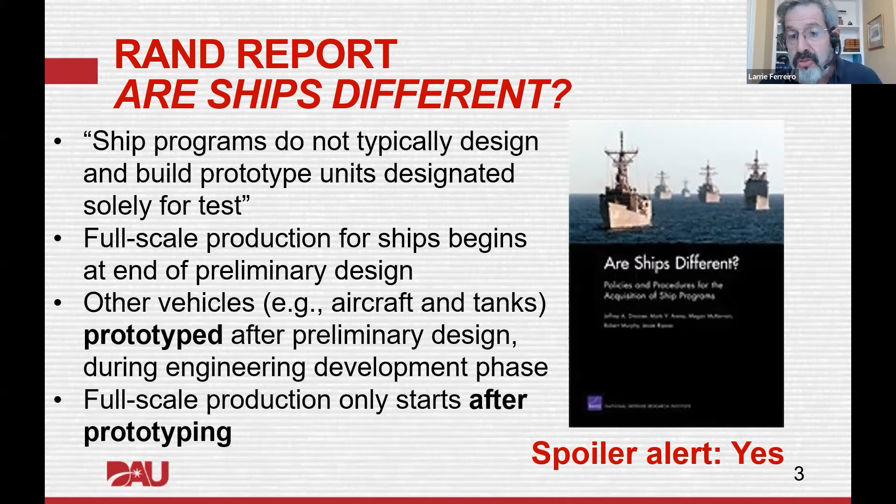Next slide, please. So the first thing I did was take a top line view using publicly available information on ship and aircraft programs. I chose ships and aircraft specifically because they represent, in many cases, equivalent amounts in terms of unit cost. So a top line ship might have a comparable unit cost to a top line aircraft.

And even though the production numbers can often be quite different, in theory, once you've done your R&D, you should be able to produce 5 or 10 or 100 models of the same platform, no matter what it is, because you've done the research and development leading to production. So I am specifically here comparing not production costs, but the cost to develop and get ready for production these kinds of platforms.

I've looked at 4 comparisons. The first is from the UK, two programs that were approximately contemporary, 1980s: the Type 23 frigate and the Typhoon fighter. The development cost for the Type 23 frigate was less than $1 billion, while for the Typhoon fighter it was $24 billion. That's a 34 times difference in development cost, before the ship or aircraft even began production. I'm not talking about total cost, just the cost to get the thing ready to be built. So that 34 times is not 34%, it's 3400%.

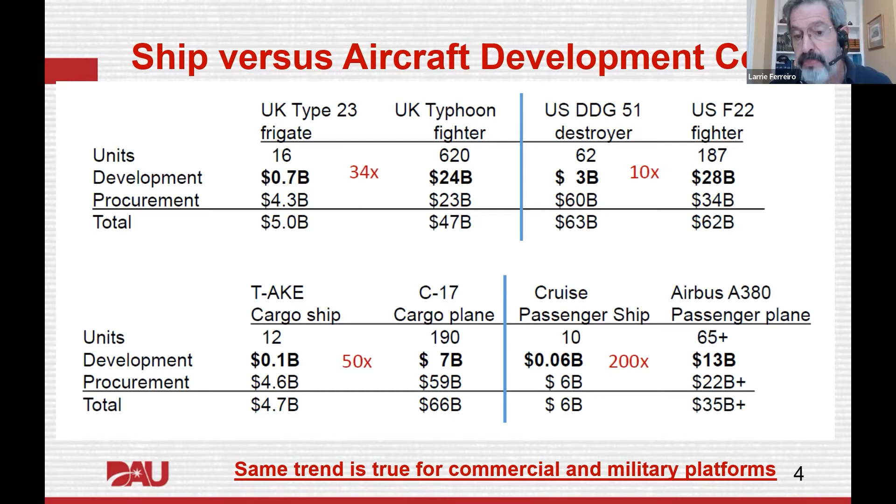This is a 200 times difference in development cost: a passenger plane at $13 billion, versus about $60 million with an M to develop a cruise ship. That's 2 orders of magnitude, 20000%, whatever form you want to call it. It's enormous, and any minor variations in some of these costs would have almost no effect on the overall bottom line. It is far, far, far more expensive to develop an aircraft - by 1 to 2 orders of magnitude - than it is to develop a ship, whether military or commercial. So that's the first bottom line.

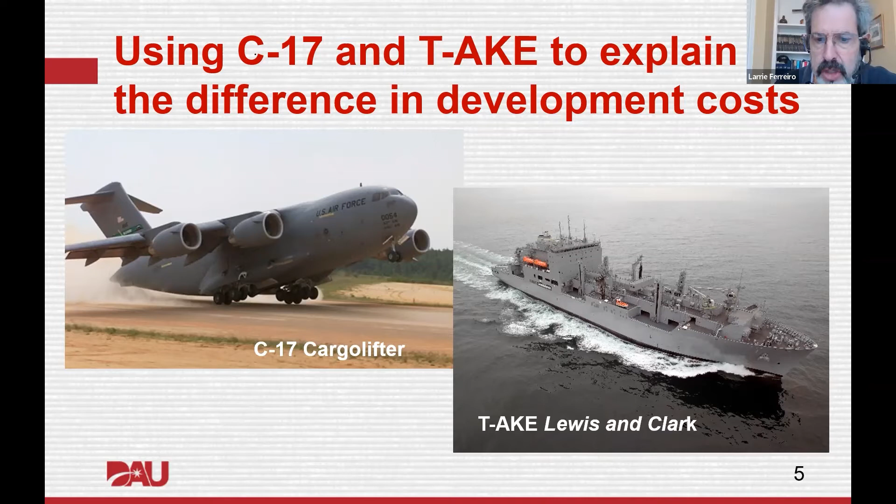Next slide. I wanted to find out why that was the case, and to do so I took a deep dive into two platforms, again somewhat contemporary - 1980s, 1990s - the C-17 cargo lifter aircraft and the T-AKE Lewis and Clark ammunition ship.

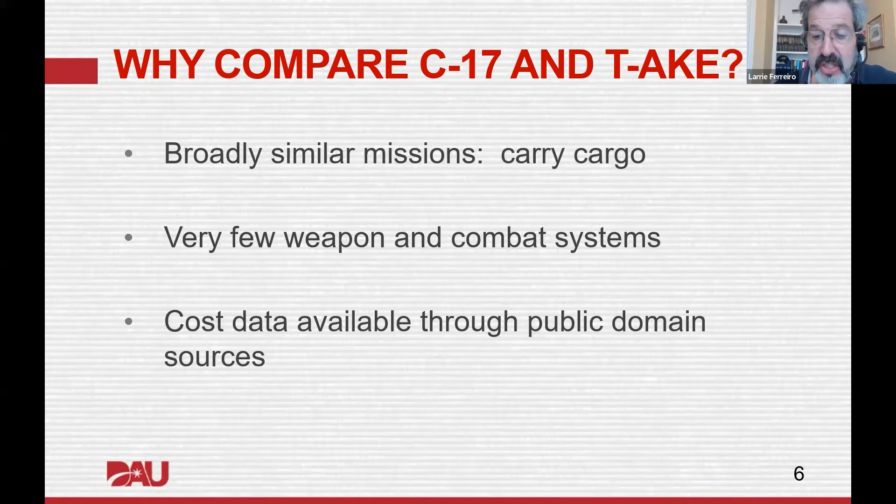The mission of the ship was to carry cargo, so these are not ships designed to normally accomplish frontline combat duties - they don't have weapon systems and combat systems, which tend to skew the numbers. They were, for all intents and purposes, as basic an airframe and as basic a ship as I could find, and most importantly, I could find cost numbers through public domain sources. You can imagine getting cost numbers from Boeing or from Carnival published is probably a bridge too far. So these were all publicly available numbers in enough detail that I could make a side-by-side comparison, which I did.

This is the second bottom line: when looking at development cost - and this is only development cost, not production cost - each of these platforms, when fully developed and in production, cost between 150 and 250 million dollars each. So the unit production cost of the ship and the airplane was not terribly different. I want to be very clear about what I'm saying and the basis for it, because frankly these numbers are surprising.

The predicted 1991 research, development, test and evaluation cost for the C-17 was estimated to be $4 billion. The actual cost from later data took it up to 6.6 billion. By contrast, the R&D cost for the T-AKE, most of which was in detailed design, was only 150 million. So on the left side, 6.6 billion with a B; right side, 150 million with an M.

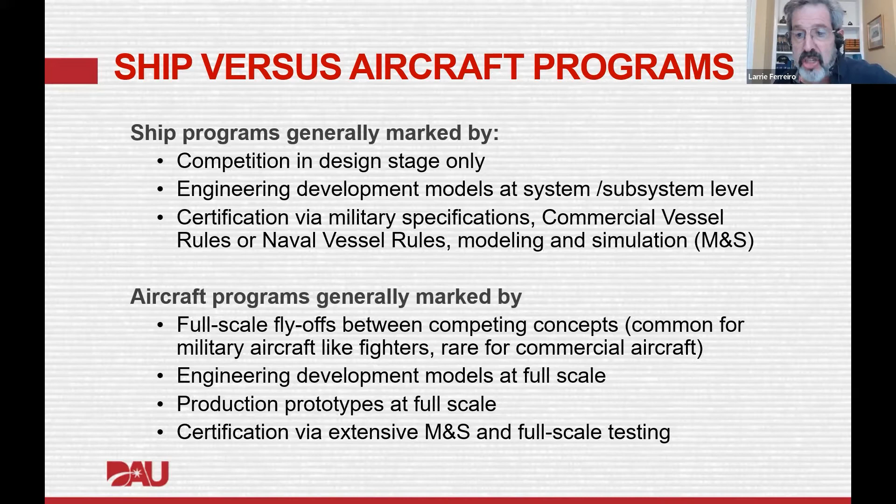Next slide, please. So I'll walk you through what it looks like at each stage so you can get a better idea of how this change flows through the design and development phase. And this is taken from a typical large engineering program. Military programs follow these steps.

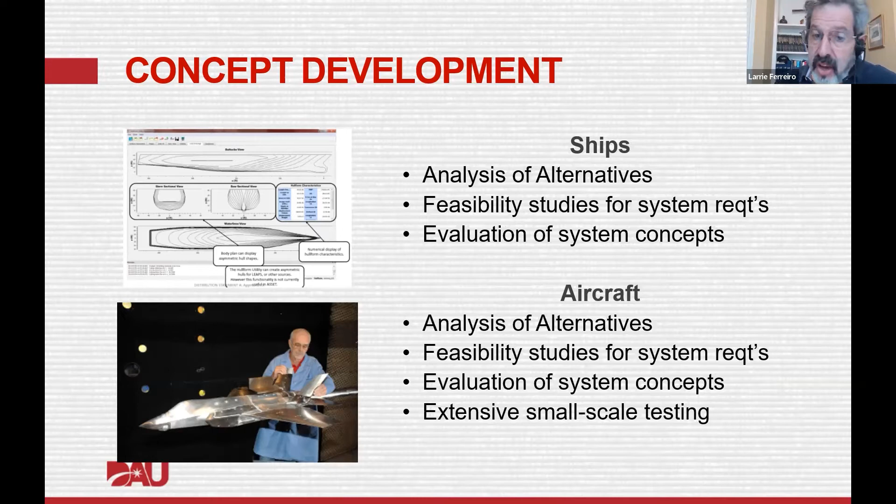Broadly speaking, the first one, I'm not going to use milestone A, B, and C. Concept development, that's the earliest stages where you're just trying to figure out what you want to build. For ships, they're paper studies, they're computer studies. For aircraft, you do both, plus you do a lot of small scale testing, usually in wind tunnels and other types of testing facilities. So already you're seeing a difference at the concept development stage. Ships are never physically modeled, and if they are, that's a really rare occurrence. Next slide, please.

I'm sorry, I'm going to have to pause here, okay?

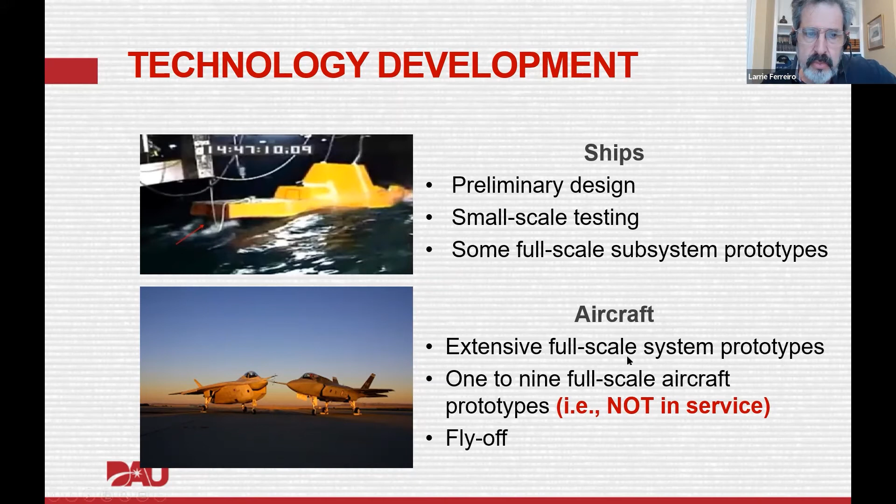Finally, when ships or aircraft are put into service or ready to be, the way they're accepted is also different. As I've already mentioned, the detailed design and construction for ships is certified through plans and then inspection. American Bureau of Shipping, Lloyd's Register, Germanischer Lloyd do this using essentially visual inspections and other inspections, but they're not tested at full scale compared with aircraft.

For those who haven't seen the bottom left frame, that's an example of what's called a wing breaking test, a certification by full scale testing. What's going on there is this aircraft, I believe a 787 with composite wings, is being bent until it ruptures, and that is full scale. The rupture test is intended first to verify it will meet load standards, and second to help improve the modeling and calculations. So this is a full-scale destructive test, and we never get to do that with ships.

Most of us would have to go back about 100 years to examples of where we took an actual ship and broke it in half. This is another example of how ships and aircraft are different. Next slide.

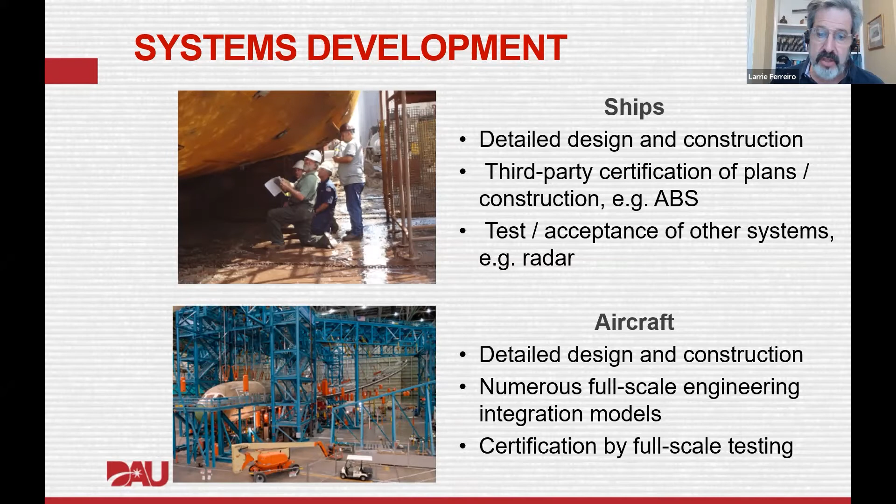So I am saying the same thing: the primary driver is full-scale testing and prototyping for aircraft versus the rules and standards for ships. This led me to the next question: why is this the case? Next slide.

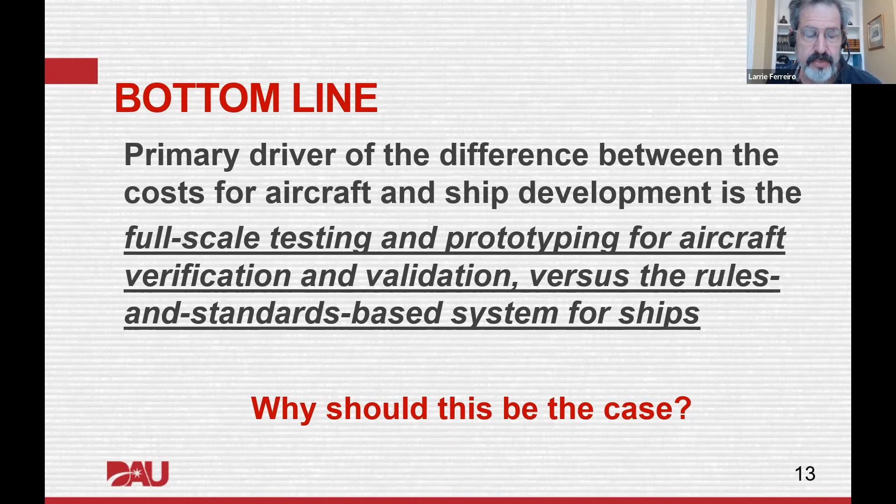The first thing I want to do is bust some myths, because in my discussions with many engineers from both sides of the aisle, the aircraft aisle and the ship aisle, I received many comparable explanations, none of which held water, so to speak. The first one is that when things go wrong in the air, you don't have time to bail out, whereas when things go wrong at sea, you have time. Well, that ain't the case.

First of all, most of us in the commercial world know about the Estonia, which lost 800 people in 1994. Compare that with TWA 800. And by the way, fighter aircraft have ejection seats. More recently, we have the cargo ship El Faro, lost with 30 or 40 crew aboard. So the idea that aircraft are more safety critical goes out the window.

Ships have lower production numbers, but again, the numbers are not so different that they would account for the enormous disparity in R&D costs. The DDG 51, by the time it's done, might actually have 100 units. That's in the ballpark of F-22s, and the B-2 bomber only has 20.

Finally, the idea that aircraft are more complex than ships also falls by the wayside. There's no widely accepted metric for complexity. Let me be very clear: the metric I am using was from RAND, which is a very simplistic and not particularly satisfying 'how many piece parts does it have' metric. Using just that, an Ohio class ballistic missile submarine has twice as many piece parts as an F-16 fighter. So again, the potential engineering reasons for why it should be so much more expensive to develop aircraft fall by the wayside.

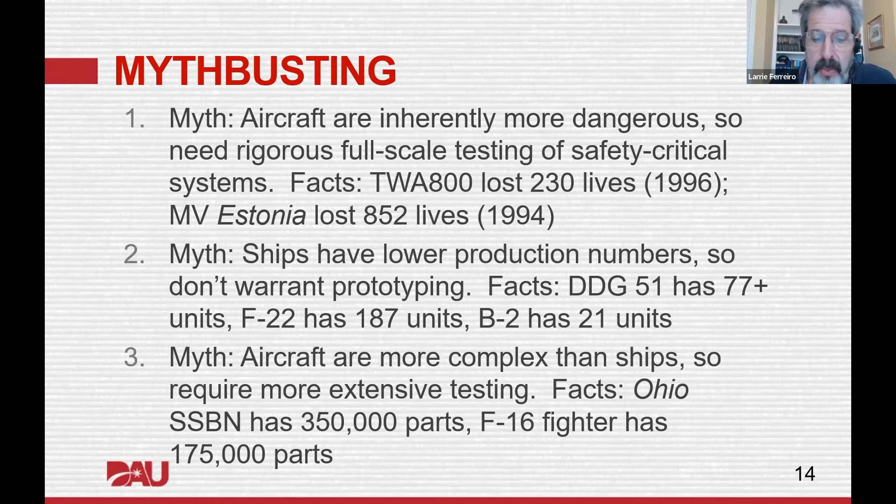Let's go to the next slide.

My conclusion, number one, is there aren't any valid reasons. Well, I'm going to start from the bottom. There are reasons why shipbuilding programs could and should have full-scale prototyping, because many of the dangers we face in the maritime world are sufficient to require some kind of verification and validation at full scale.

There aren't any real reasons why aircraft could not use the kind of rules and standards method that ships have. And in fact, that did happen, and I'll get to that in a few slides. So the two types of vehicles really could have comparable verification, validation, and prototyping programs, but they don't.

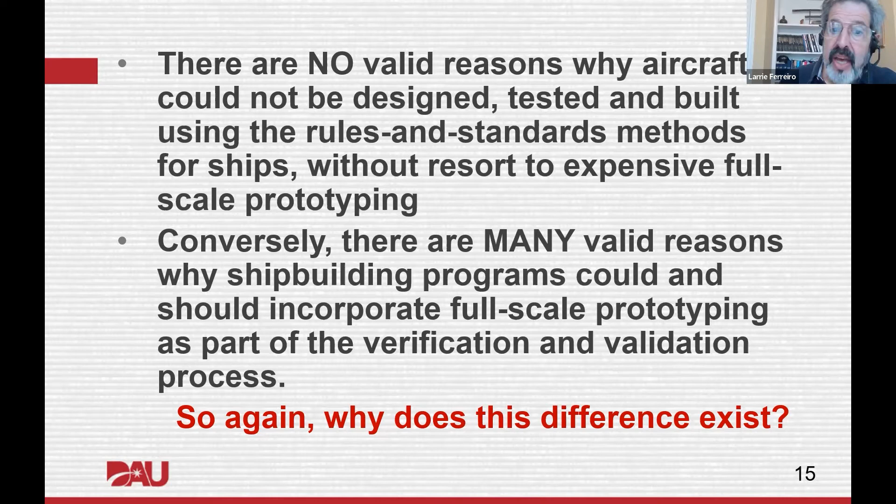So I keep coming back to the same question, why? And as a historian, I will tell you why. Next slide.

Ships came from the civil engineering world. The modern methods of designing and building ships were developed at the same time as the modern methods for designing and building civil structures like bridges, skyscrapers, roads, and railroads. And if they look similar, it's because the same people did both.

In Britain, Isambard Kingdom Brunel famously built bridges, and he built the Great Britain and the Great Eastern. His contemporary, the structural engineer William Fairbairn, did very much the same. And through history, you saw this parallel development of civil engineering and naval architecture, which never really fully diverged.

This is an example that I love to give. I went to look at web frames and plating analysis in the ABS steel vessel rules on the right, and the New York City structural code for bridges on the left. The basic idea that you're using formulas based on things like length and depth and a few other items is remarkably similar.

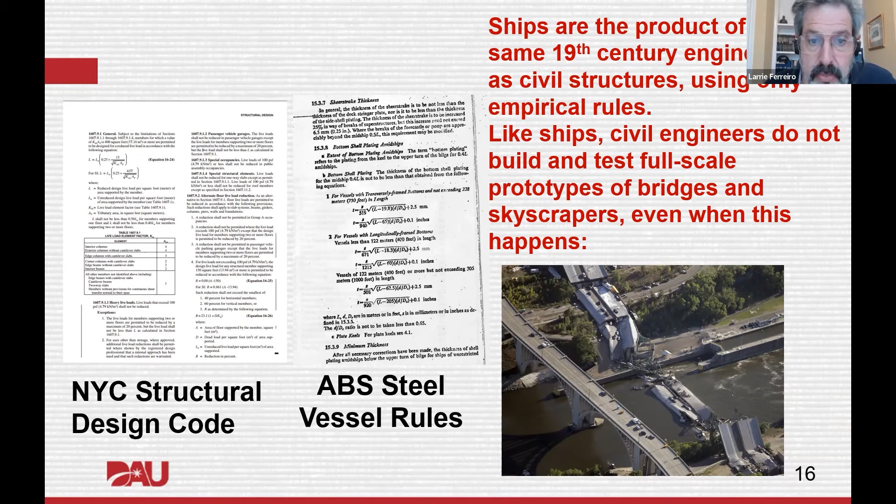Aircraft grew up in the 20th century world of physics. The people most noted for development of aircraft engineering, Prandtl and von Karman, were engineers, but they had the same education as Einstein. It was grounded right from the beginning in first principles physics, and the money followed.

As early as the 1920s, we saw this difference. In the United States, there were two ship model basins, one in Washington, the other in Michigan. The experimental model basin under David Taylor had, in then-year dollars, $100,000, and NACA, the National Advisory Committee for Aeronautics, which was the predecessor to NASA, already in 1920 had 10 times the funding for R&D.

The X programs are another example. In the 1960s in the United States, you had something called the second offset strategy. This was a way of countering the Soviet numbers of troops and guns and tanks, not by trying to defeat them tank for tank and troop for troop, but by outthinking them and pouring huge amounts of money into the technologies.

I know in one of the previous discussions I was in with all of you, there was a question about when computer-aided modeling and computational fluid dynamics was developed. That was always developed by the aerospace industry because that's what money was being thrown into.

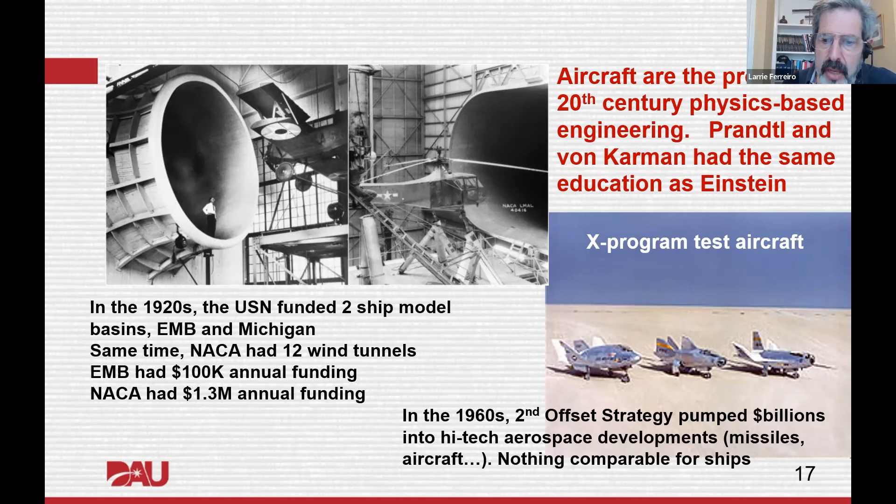And even today, if you look at the US budget, aircraft account for three times the amount spent across the DoD compared to ships, in design, construction, maintenance, and operations. So the money has always followed aircraft, and the R&D and testing and prototyping and validating follow the same pattern. Next slide.

Now, as I said, I just want to be certain you understand that there isn't a valid reason why we could not do what ships do. In the 1930s, ABS, Lloyd's Register, and Bureau Veritas all set up aircraft divisions to do the same kind of class system that was used on ships. And it was successful for a while, until governments took over airworthiness, and then that stopped. They went back to this very physics-based process. Next slide.

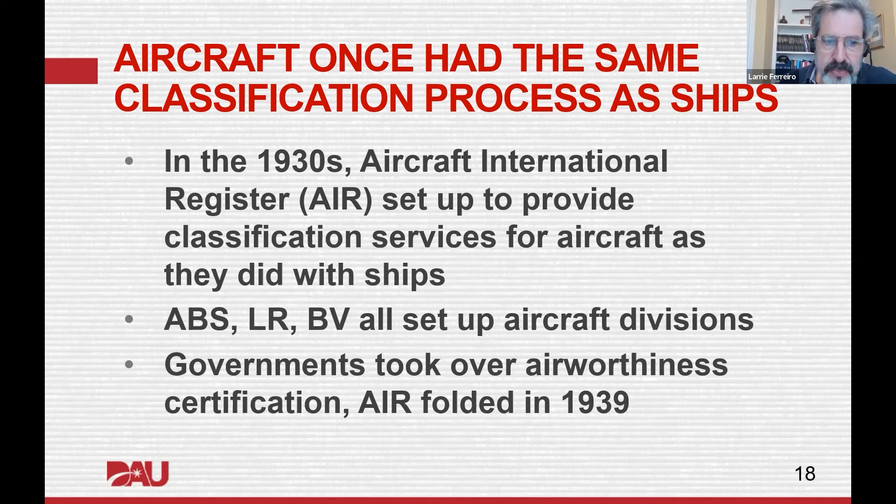So my conclusions. Number one, repeating, it is much more expensive to develop an aircraft. And the rationale is not because the platform is different, but because aircraft are the product of 20th century first principles physics-based engineering, and ships are the product of 19th century rules of thumb engineering.

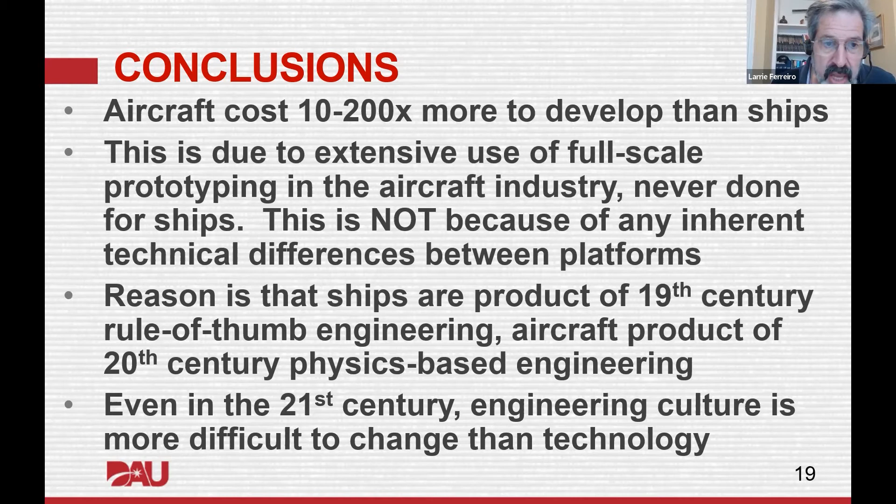And it hasn't changed even here in the 21st century. So my next conclusion is that we should not accept this fact lying down. As I've said, there are many reasons why ships should and could look more towards systems engineering and full-scale prototyping as a way of improving the product.

To give one example, the Estonia, which had an accident where the bow visor was found to be faulty. Even after that, there was no systematic effort to define the wave loading of why the bow visor failed. There was no effort to make full-scale tests. All of the testing was done by scale models, empirical methods.

There are real and cost beneficial reasons why full-scale testing and full-scale prototyping could result in overall savings in lives, property, availability. You know, in the Navy, for example, we've had several collisions of destroyers with cargo ships. None of those collisions needed to have been fatal.

There are already structural systems available in the commercial world that can protect a vessel from being holed, meaning having a hole punched into its side because of a bulbous bow. Those have never been systematically explored by any Navy. So there's no reason to discount using full-scale prototyping in

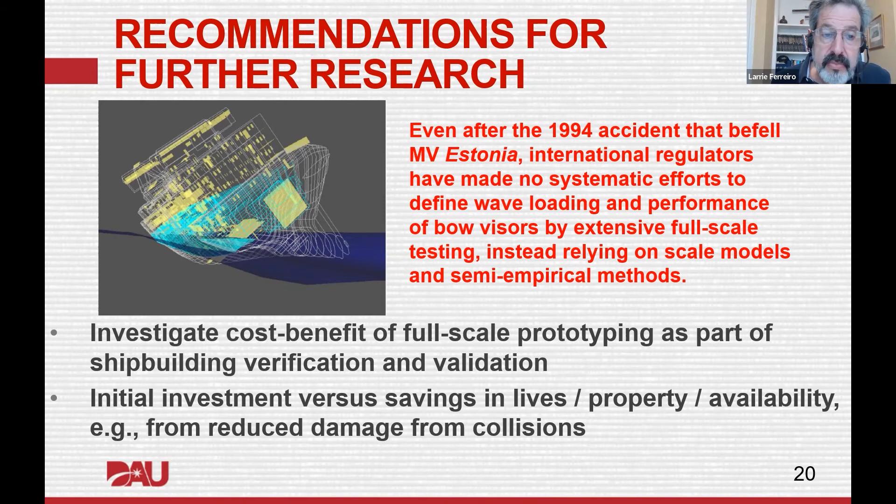building, verifying, and validating ships. And that is my presentation. And I'd like to open the floor to questions.

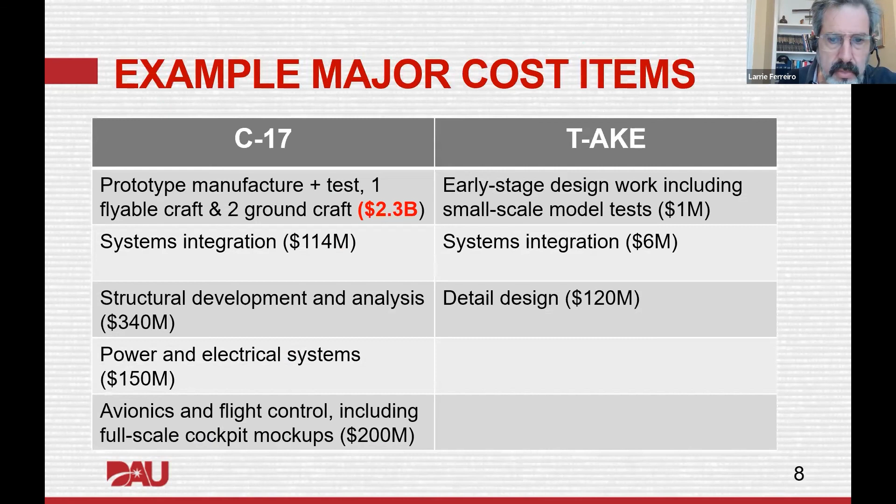So if you can just go to your slide 7. Can you go to slide 7, Jaime? And he's asking the question, the very high PM cost, management cost. Percentage, they are typically a percentage of the overall R&D costs. It costs more to manage a $6 billion program than it costs to manage, well, once you take away the detailed design, a $20 million program. So that explains the PM costs.

As far as rules go, here we're talking about things like airworthiness certificates. And airworthiness is a whole series of tests which are done at a combination of full scale plus modeling plus extensive series of flight tests. And Peter, I'm not quite sure I fully understand what you mean by mission performance requirements, especially for something like the T-AKE. So could you elaborate so that maybe we can compare apples, as it were, with apples?

If we can unmute Peter, maybe you can ask the question directly, Jaime. Hello, can you hear me? Yep, fine. Yes, I can. Okay. Hi, Peter. How are you? Hi, good to see you all, and another great presentation.

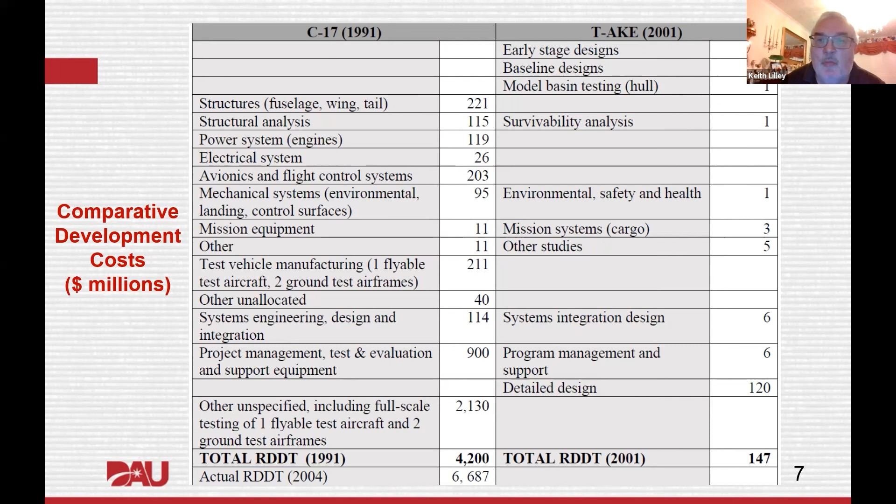The need to reduce weight is something I looked at. It has some effect, certainly, but it was possible, and it did happen in the 1930s, where lower weight aircraft were built according to sort of rules of thumb that were being used at the time. And they, as far as I can tell, did not suffer any performance loss. Now, it's a little hard to project what would happen today, but the one thing that you probably already know is that aircraft and ships live in two different environments.

Making a ship bigger and heavier actually often saves money, especially if you're talking about building it with more interior space and interior margin and heavier structure that doesn't need to be as finely tuned. You can often get away with making it heavier and having it cost less because the workmanship and maintenance costs go down. But every pound that you have to lift into the air for an aircraft is costing you in terms of fuel and cost in terms of engines. So displacement is free, but putting something up in the air is not. So they really live in very different environments.

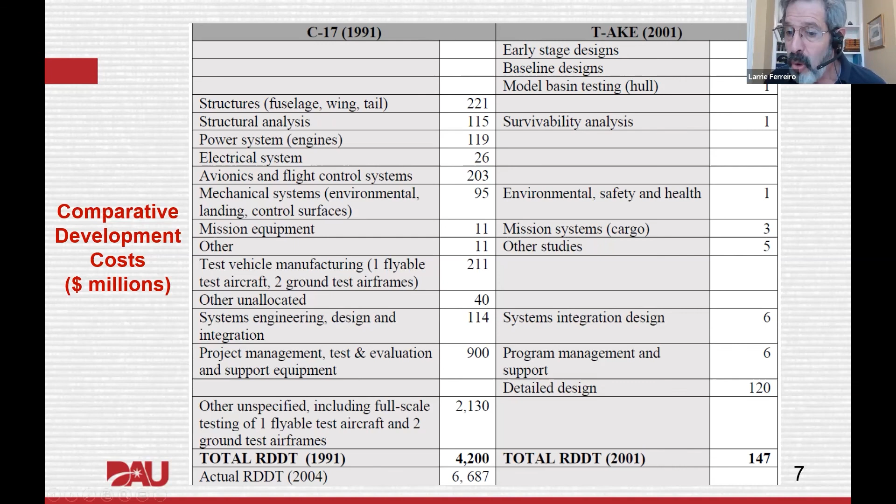But again, I want to be clear that by itself doesn't seem to account for the difference, because that was being done in the 1930s. It was abandoned, but it was successful.